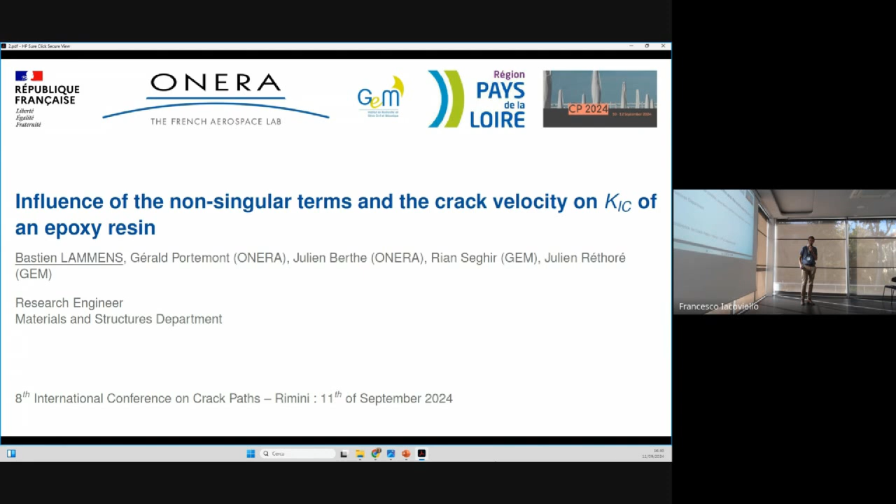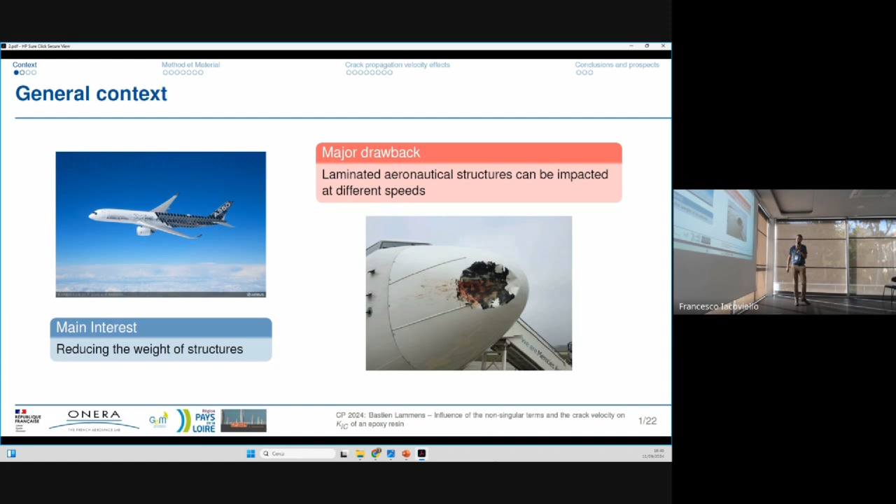So in the aeronautic field, composite materials are used to reduce the weight of the structure. We can mention the Airbus 350, which is manufactured with at least 50% of composite materials. But this type of material can be impacted at different speeds, which can destroy the structure, as we can see here with a bird strike.

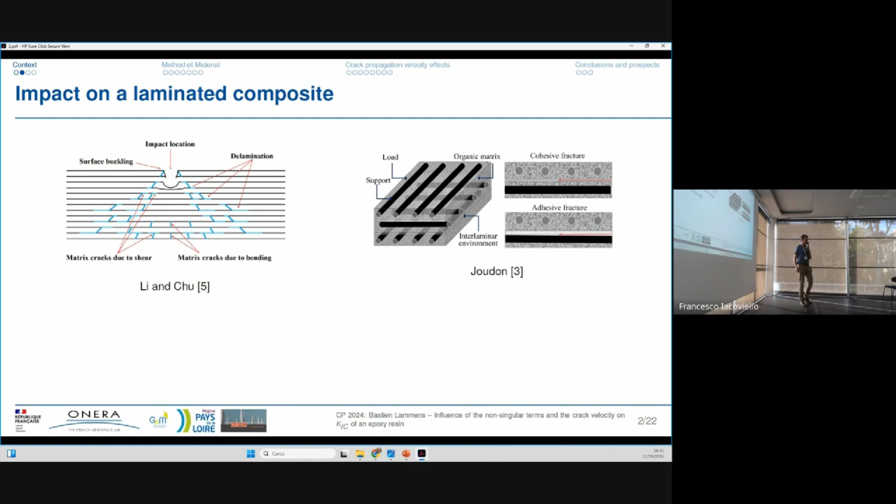Indeed, when the composite material is impacted, there are different fracture mechanisms. We can mention matrix crack, fiber crack, or delamination. Delamination is the decohesion of the interlaminar environment, which can lead to the destruction of the structure. When we speak about delamination, there are two types of fracture: adhesive fracture, when the crack propagates at the interface between the matrix and the fiber, but there is also cohesive fracture, when the crack propagates only in the matrix, in the resin. So in my work, we have only focused on cohesive fracture.

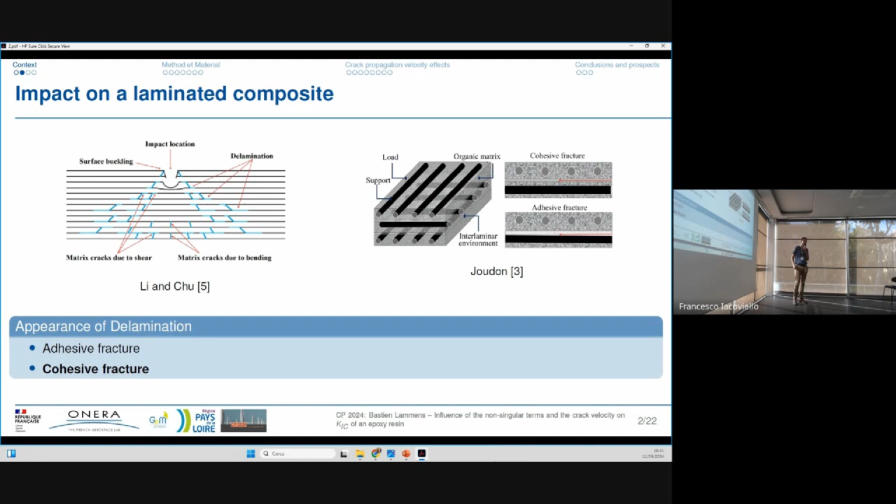So the question during my PhD was how to evaluate the critical energy release rate, G1C in mode 1, for high crack velocity, because we have high crack velocity when we have a bird strike, for example. So there are two main approaches that I can mention. The first one is the macroscopic approach with global measurements, load, displacement, and it allows us to determine the critical energy release rate, G1C. But in the literature on composite materials, there are important variations of the results between the different studies.

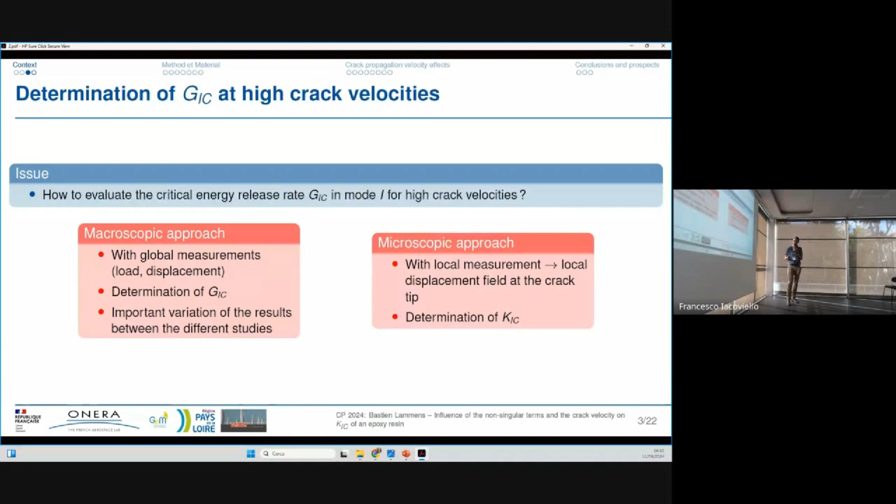The other approach that I can mention is a microscopic approach with local measurement near the crack tip, and it's based on the determination of the critical stress intensity factor, K1C. So in my PhD, we decided to use this second approach. So I will develop the method that we used and the materials that we studied, then the crack propagation velocity effect, and I will conclude my presentation with some conclusions.

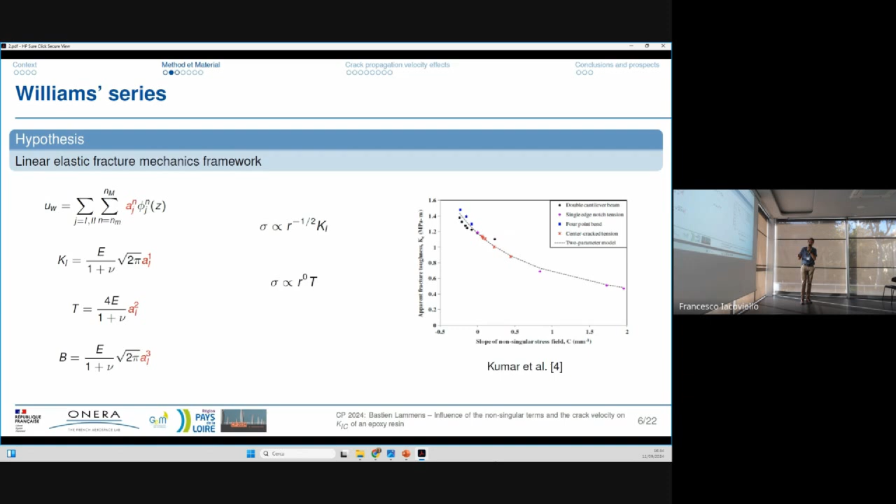But the literature shows that there are also non-singular terms which have to be taken into account to see geometrical effects. Ayatollahi et al. mention that there are different crack paths according to the considered specimen. And if you look at the influence of the T stress value, you can see that if you change the T stress value, you have a modification of the far stress field. Kumar studied the B stress, the second non-singular term, and showed an influence on the apparent fracture toughness depending on the considered specimen. Now, if you look at the von Mises stress, you can see that the modification of the B stress has an influence on the far stress field because of this relation.

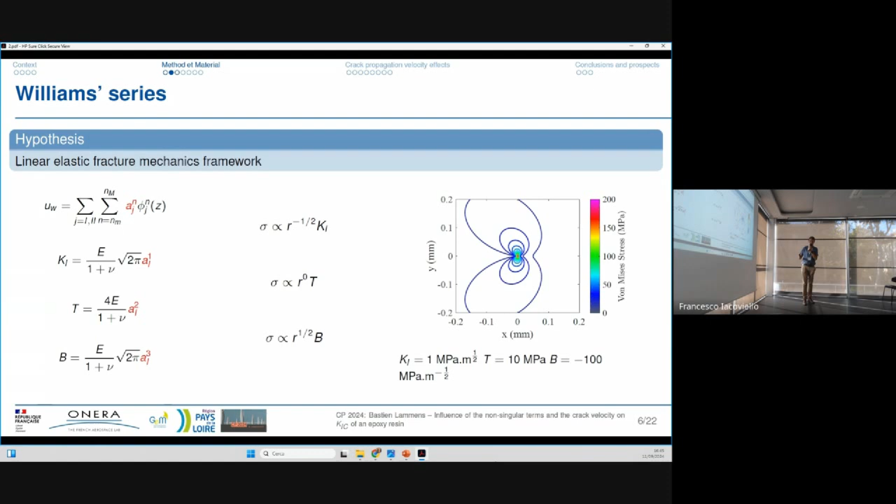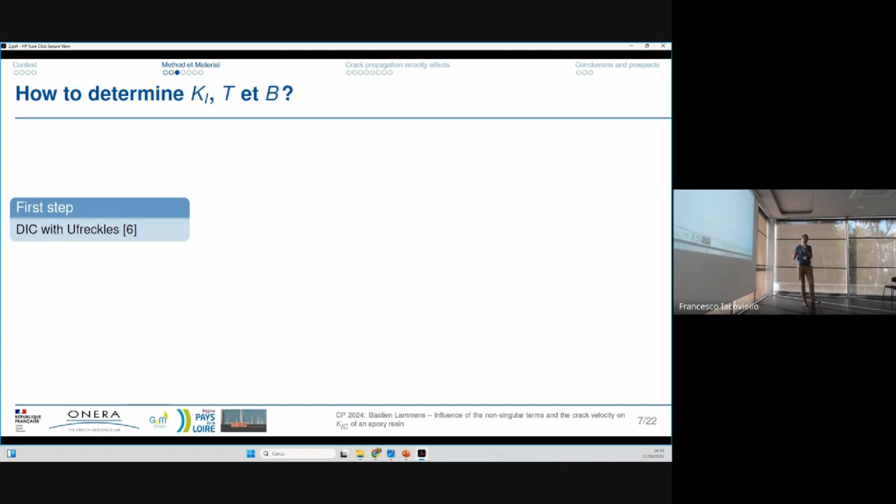So the question is how to determine these three terms. So we developed a method based on digital image correlation with UFreckles software. We have an example of digital image correlation here. With numerical parameters, mesh, spatial resolution, temporal resolution, speckle pattern, we need to be careful with these parameters. And the second step is the projection of this displacement field onto the Williams series. We have an example of the projection here. And we have to be careful with the projection zone, especially the minimum radius and the maximum radius.

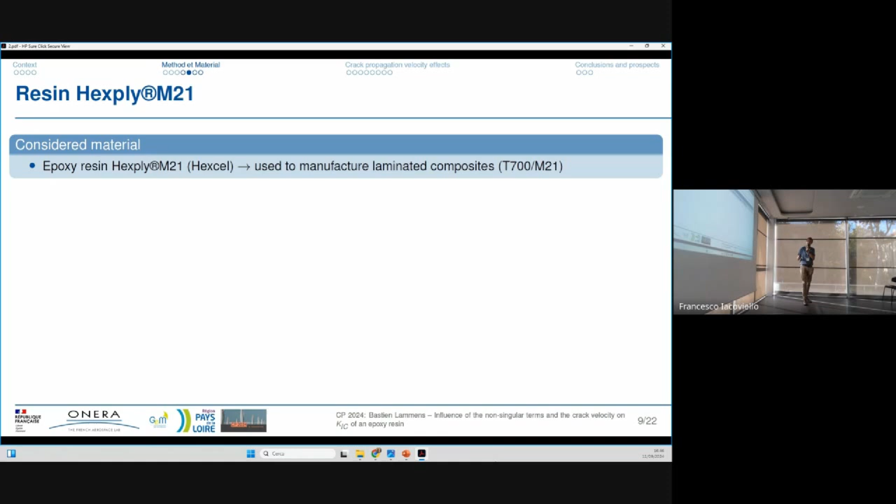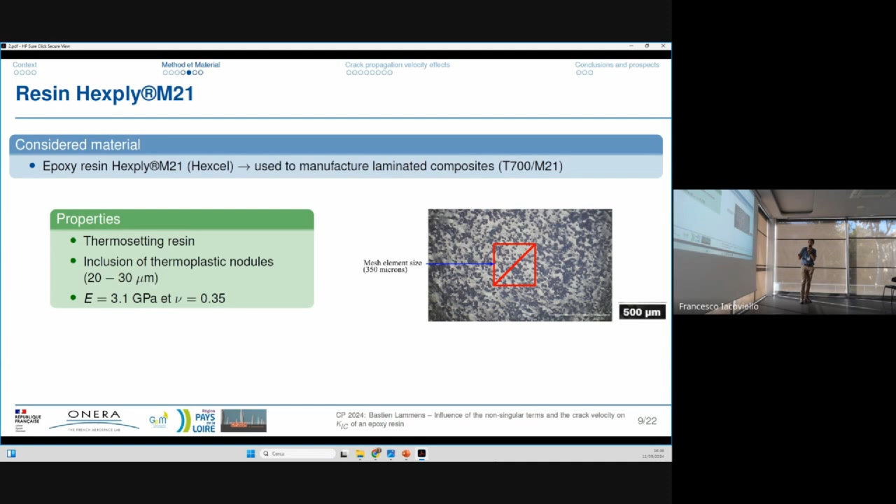So during my PhD, we studied the epoxy resin Hexply M21 used to manufacture laminated composites. It's a thermosetting resin with inclusion of thermoplastic nodules and with these elastic properties. We have an example of the resin, with the black points corresponding to the thermoplastic nodules. And the mesh elements that we use for the calculation of the KIC have a size of 350 microns, which is larger than the size of the nodules. We have a homogeneous scale.

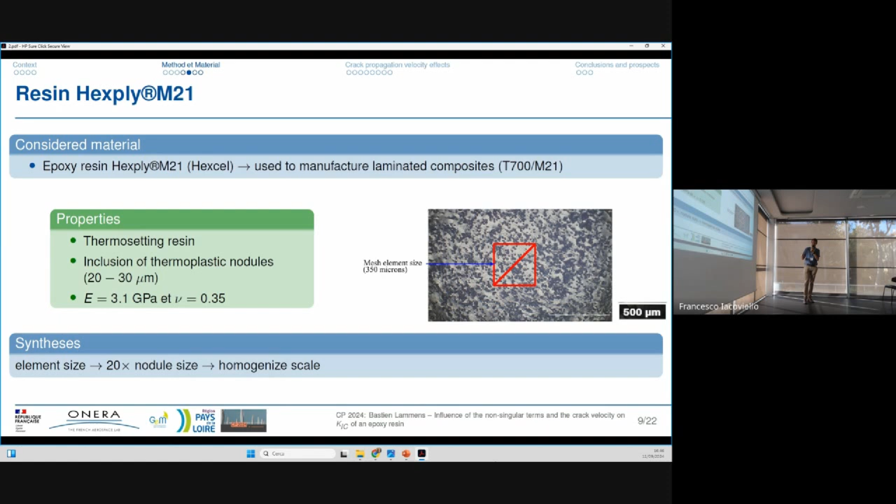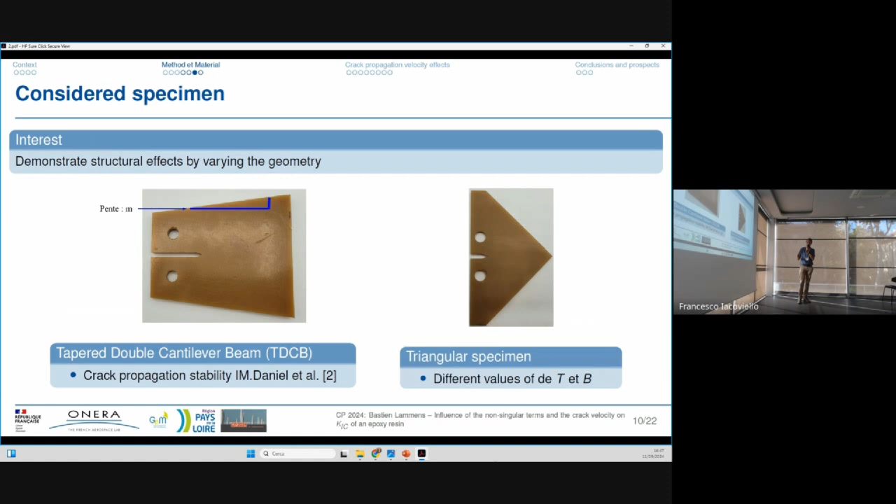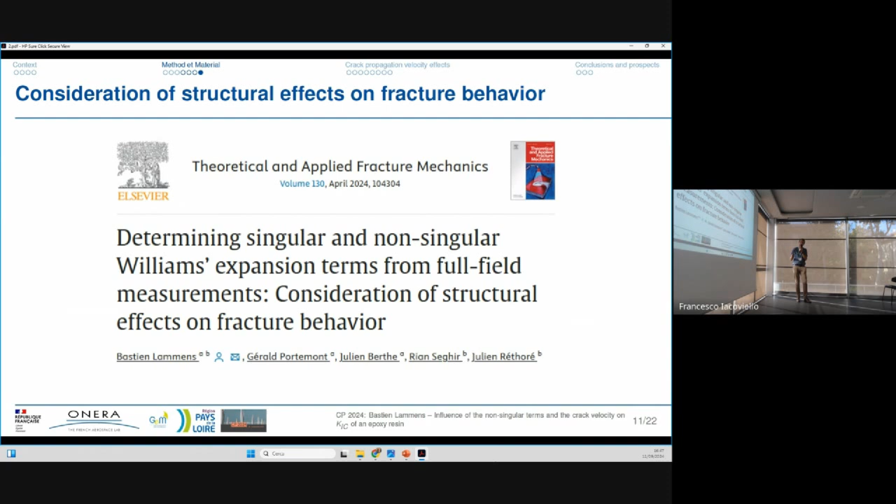So to demonstrate the structural effect, we use different geometries, different specimens. The tapered double cantilever beam, TDCB specimen. We have crack propagation stability according to the literature. And we chose another specimen, a triangular specimen with different values of T and B. The consideration of structural effect on fracture behavior has been studied, and a paper has been written at the beginning of the year about this point. So I won't mention the result of KIC static and the different versions of the paper. I will focus only on the crack propagation velocity effect.

So we used hydraulic jacks with different loading rates to have different crack propagation velocities. We have a high-speed camera. We have the lighting. And we use the triangular specimen with a speckle pattern with black and white paint to use digital image correlation. However, with these loading rates, we have only high-speed crack propagation up to 200 meters per second.

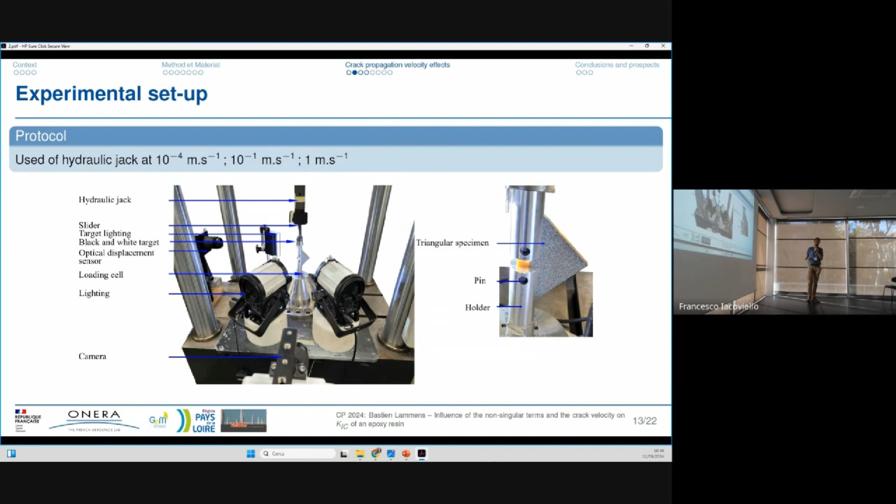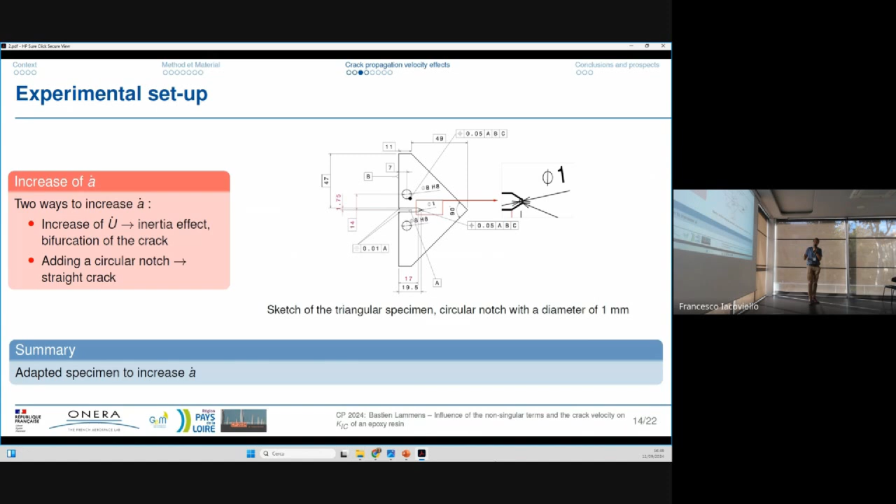We wanted to have crack propagation higher than this speed, so we decided to change something. Because we could increase the loading rates, but we had inertial effects, and the crack path was not straight. We had a bifurcation of the cracks, so we decided to add a circular notch. We replaced the sharp crack by a circular notch with a diameter of 1 millimeter to have an adapted specimen to increase the crack propagation speed.

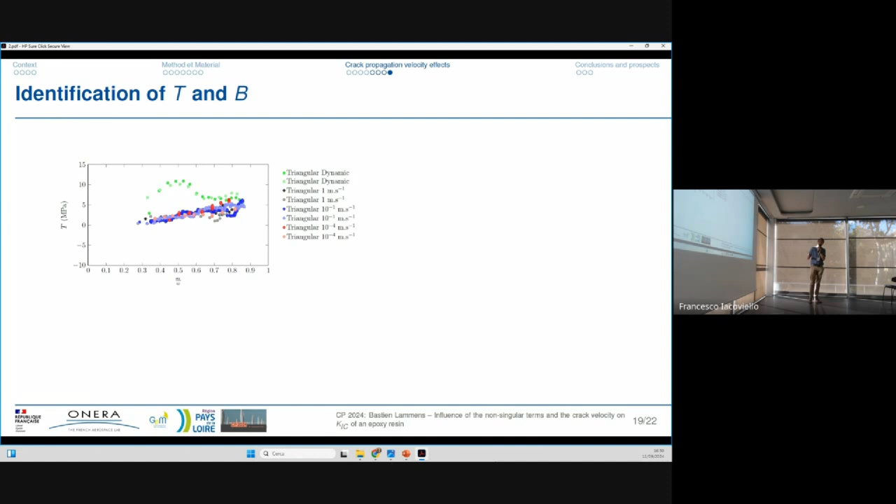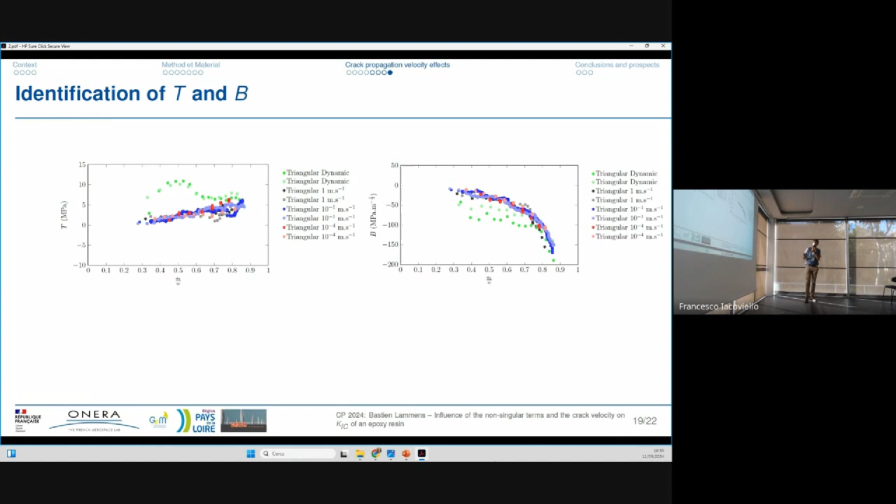For the B stress, we have a decrease of the B stress during the crack propagation, and the difference between the results can be explained by the type of notch, sharp or circular. The conclusion is that with loading speed controlled testing, we have a stable crack propagation. Stable because the loading controls the fracture experiments, and for the other type of fracture experiments, the test is not controlled anymore by the loading speed, so we call them unstable.

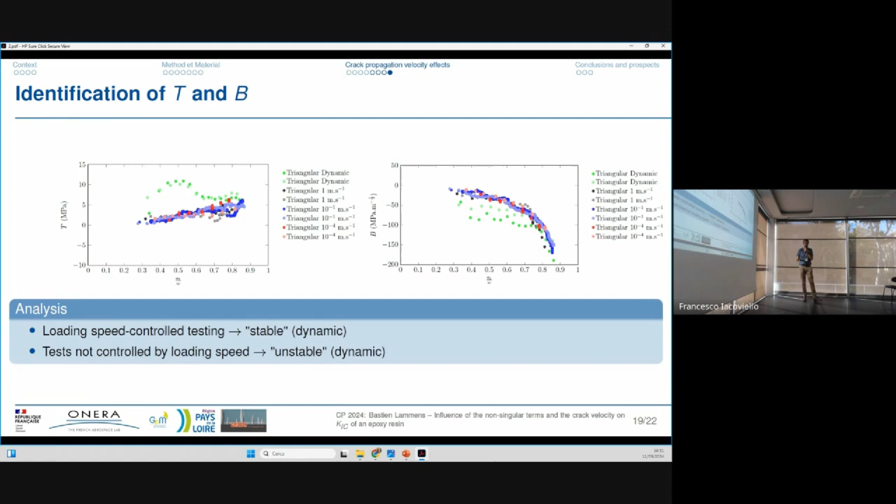So to conclude, we have developed a macroscopic analysis methodology using full-field measurements to determine the critical stress intensity factor in mode 1 and the non-singular terms T and B. We have modified the specimen to perform fracture experiments in mode 1 with high crack velocities, and we saw an increase of the critical stress intensity factor with the crack velocity. This trend has been seen in the literature for other types of material like PMMA, for example.

And so the prospects are the following: the development of a new experimental setup with other types of specimens to have a different range of T and B values, and to create a K1C model based on test data, as I did in KIC static in the paper that I showed.